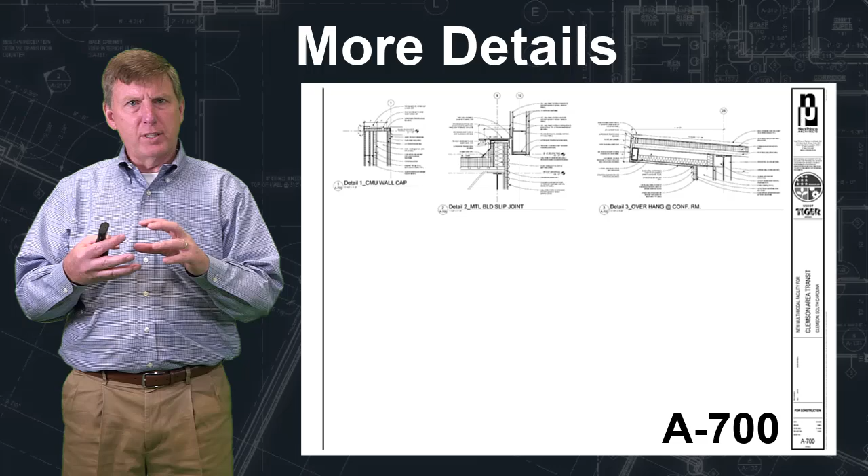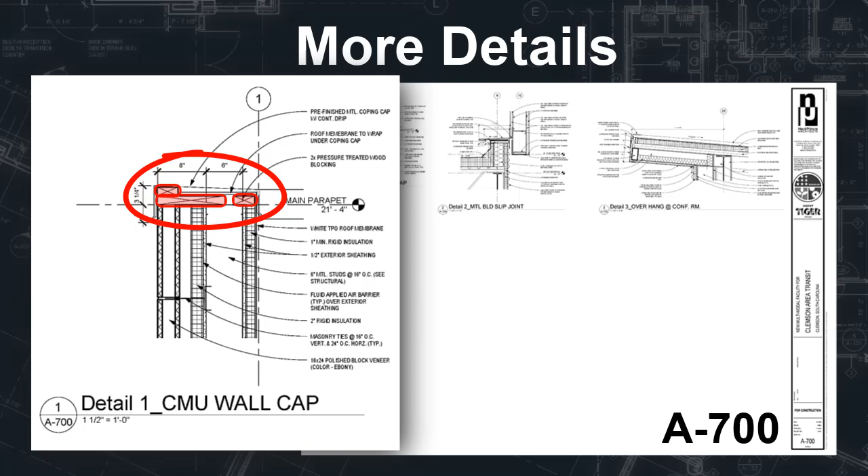There's just so much information and the details about how things fit together that I want to go through a few more examples. So here's the top of a wall and how that wall fits together. You can actually see the lumber used on the top of that wall. Hard to visualize how that all comes together until you see it for the first time.

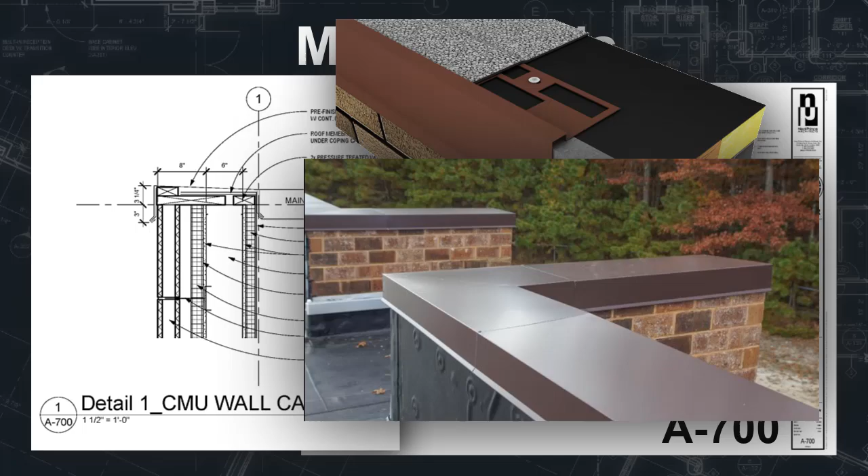So here's a picture of the layers, not of the actual wall that we're working on, but one very similar. And this is a picture of what it might look like when it's completed. Here's an interesting detail of how two walls are coming together. Right? You got the bus bay on one side where you only need to protect so much. You've got the wall of the building. Well, how's that coming together?

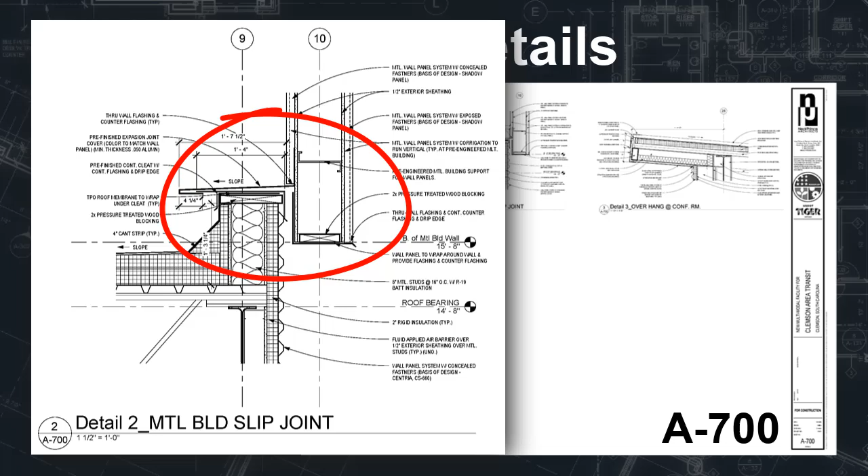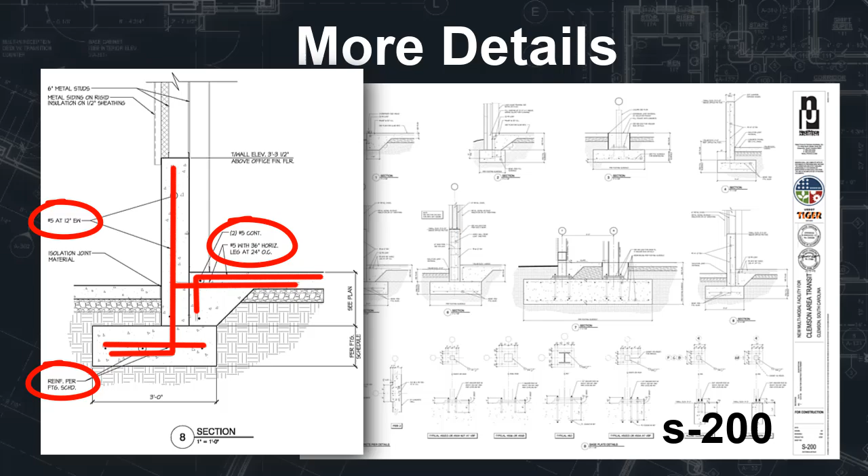When you look at this detail, you can see that every line of flashing and every part of the detail is drawn so that you know exactly what you need to do to build it. When it comes to structural details, you know exactly how much rebar is used in the system, the type of rebar, the type of anchor bolts. All that is highly detailed in the drawings for you.

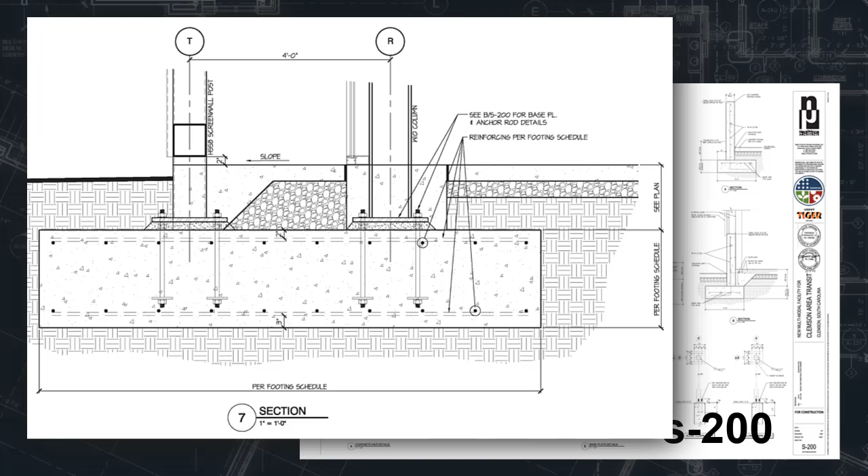Notice in this picture how the anchor bolts tie the columns to the footings. So we're transferring the load of the building through the columns into the footings. And this shows us how that happens. But how does that column actually connect to the footing? Well, there's a detail on that. And we can see in that detail that there's a metal plate that the column is welded to, and then that metal plate is bolted to the footing through those anchor bolts.

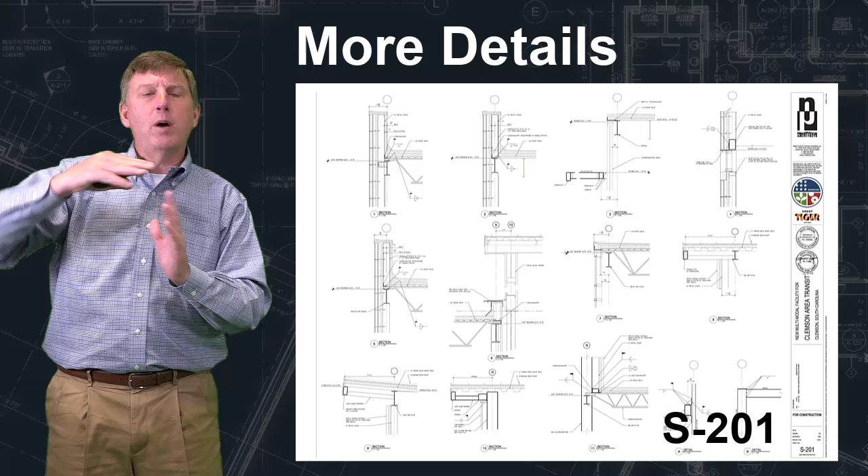What about the way the roof trusses sit on the wide flange beams? How does that work? Well, there's a detail for that. And in that detail, we can see the angle steel, the columns, the trusses, the wide flange beam. It's all right there for us. And then we have these designators to tell us what to do.

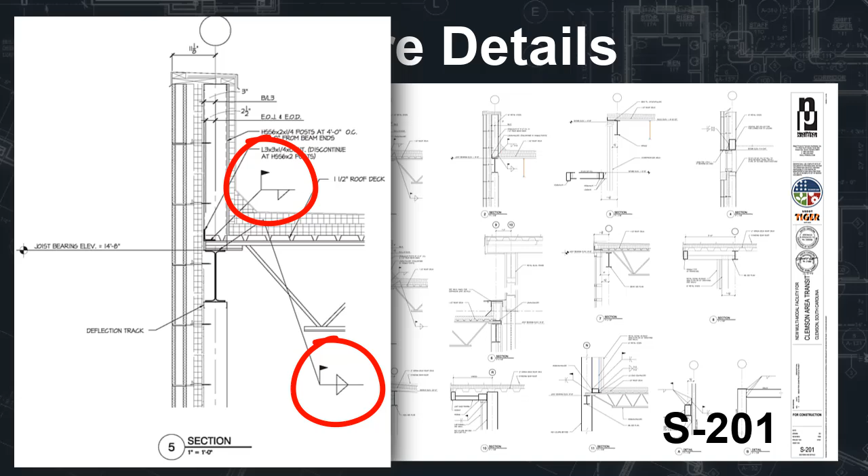Now, you're not going to find a legend or a schedule for these designations. These are weld designations. It is an industry standard. Therefore, you'll just have to know what they are or look them up in the industry standard. And here's a table of all the different weld symbols. So we can actually look at the weld symbol on our drawing, match it to the one on the table to get an understanding of what type of weld that should be.

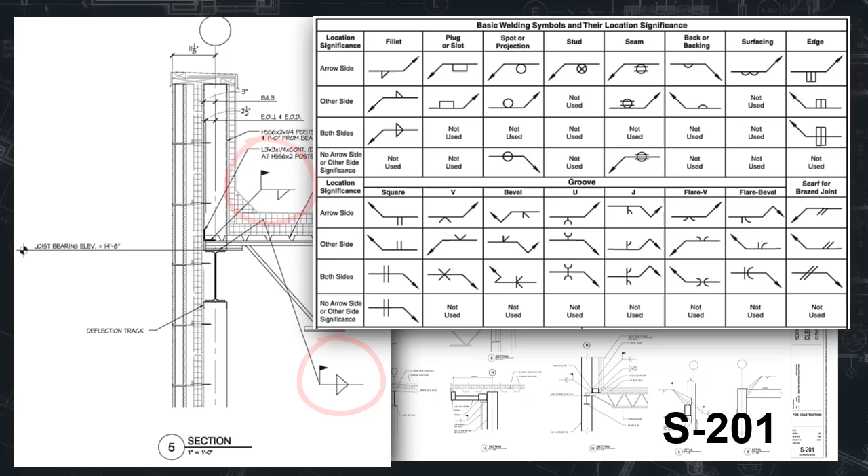And you can see that this weld at the top is different than this weld at the bottom. But do you know why it's different? You'll need to understand that, not because you're going to be out there welding, but you're going to be out there looking at welds, and you need to know that it was welded properly. You need to know that if the weld symbol indicated to go all around, that the weld is actually all around and not just tacked on a couple sides.

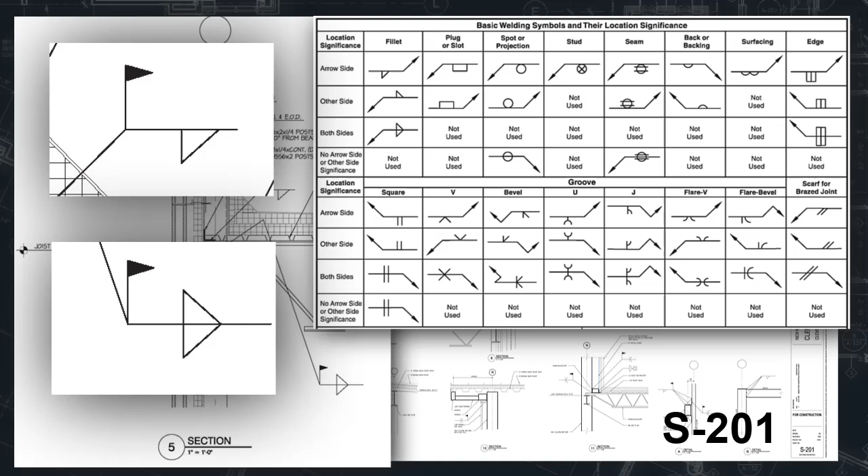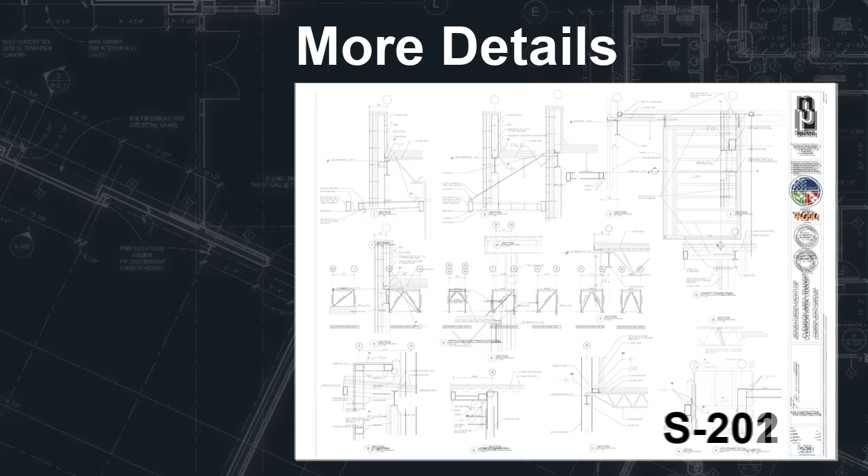You should know enough that if the weld symbol indicates that the weld should be on both sides, say both sides of the truss to the wide flange beam, that you'll see a weld in the field on both sides. And then the last thing that we'll cover in this section are the vertically braced frames. Well, what is a vertically braced frame? Basically a steel structure. We have columns, wide flange beams, roof trusses. Well, vertically braced frames are to add bracing to the structure to resist movement.

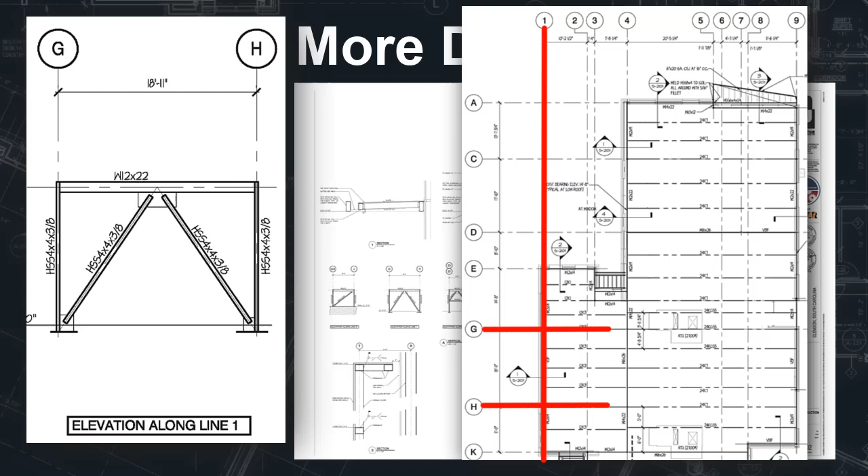Now you can find these vertically braced frames on sheet S101, the structural drawing. Find column line 1. Follow it down until you get to column lines G and H. You can see in this area that you have a vertically braced frame. And here is an example of what a vertically braced frame looks like.